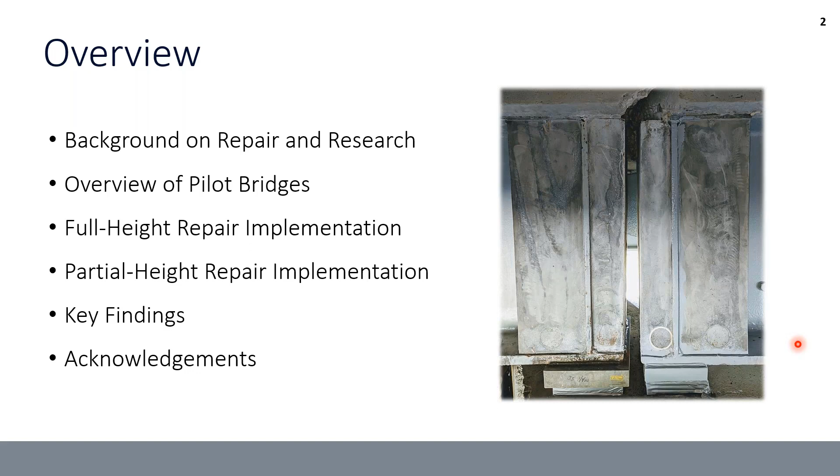So this is the issue we're dealing with. The real issue is shear transfer. The flexural capacity is fine, even if we lose a significant portion of the bottom flange, because bending moments are so low at the end of the beam that it really doesn't affect performance. But shear transfer is the major issue here, accommodating the bearing reaction forces and transferring those into the girder.

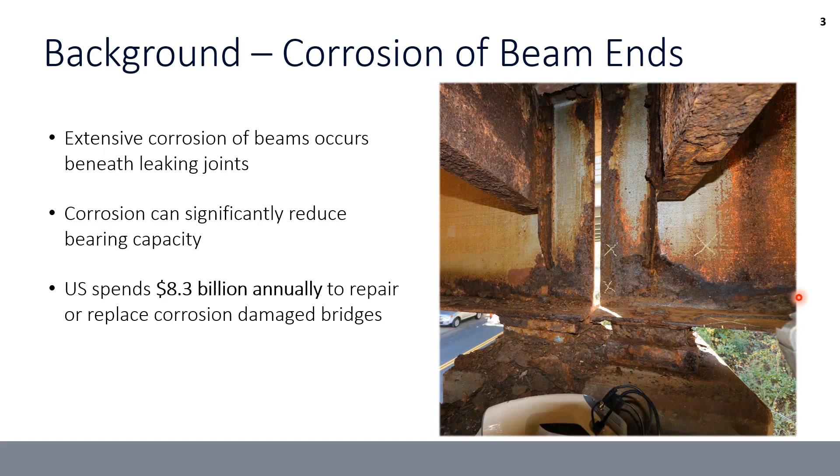The idea with this research was to come up with an innovative way to repair beam ends without jacking the structure, to come up with a repair that is structurally sound, but also stops future corrosion. Because with this kind of repair, you can come in, do a steel repair, and in 10 years you might be back repairing it again. We're trying to get a repair that's more long-lasting and durable.

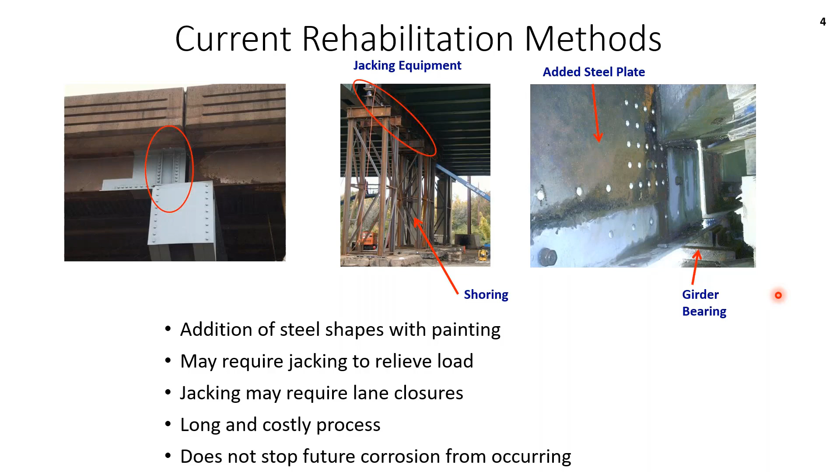Our inspectors went out there and found literally 100% section loss on every beam end. To this day, we're not sure why this bridge didn't have a more major failure, but it was discovered and we had to do an emergency repair.

The idea we came up with was essentially to convert the last 10 feet of the beam into a reinforced concrete beam. We encased the beam in concrete with a lot of reinforcing steel, converting it to a concrete beam end. Very successful repair, worked very well.

Well, then UHPC came along, which I call liquid steel - a very high strength material with tensile capacity as well as compression capacity. And the idea we had was maybe we can use UHPC to do a similar but much simpler approach to repair steel beam ends that are corroded.

Our goal was to eliminate jacking, cutting, welding, and bolting of beam ends - to simply go in and pour some UHPC to repair and restore the shear capacity of the beam. So this is the genesis of the idea.

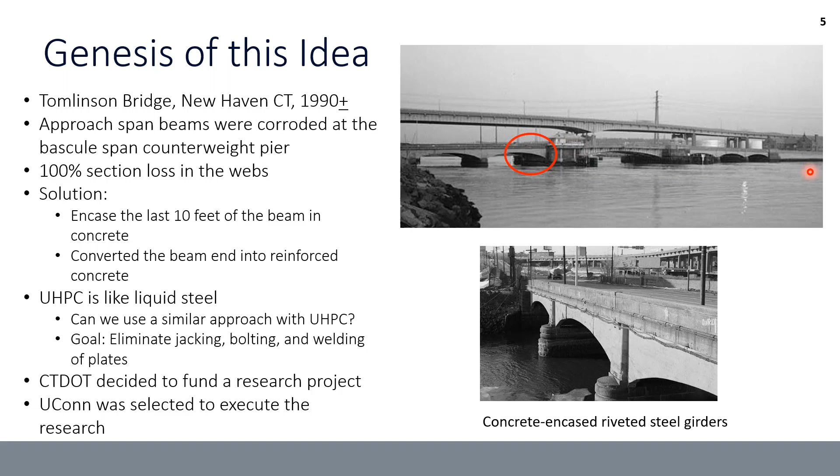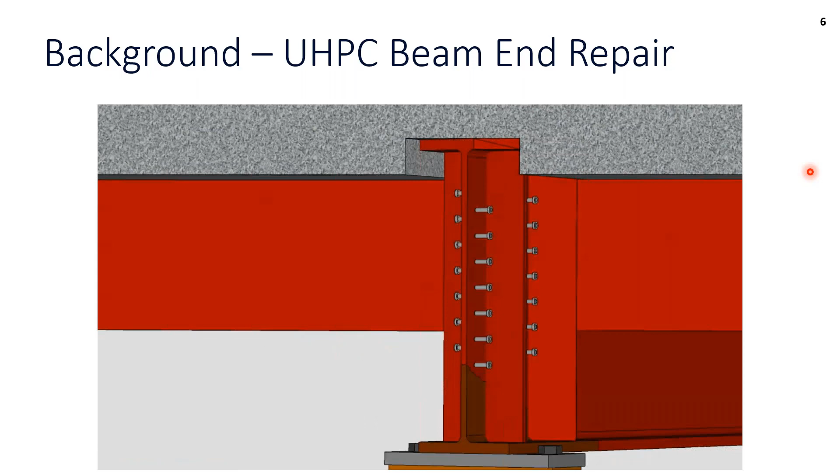The first step is to weld headed shear studs to the intact portion of the beam. We want to clean the surface, weld these with just a stud gun, and then we can encase that full region in ultra high performance concrete. What this does is create an alternate load path through the studs in the UHPC for bearing forces that bypasses that corroded region at the bottom.

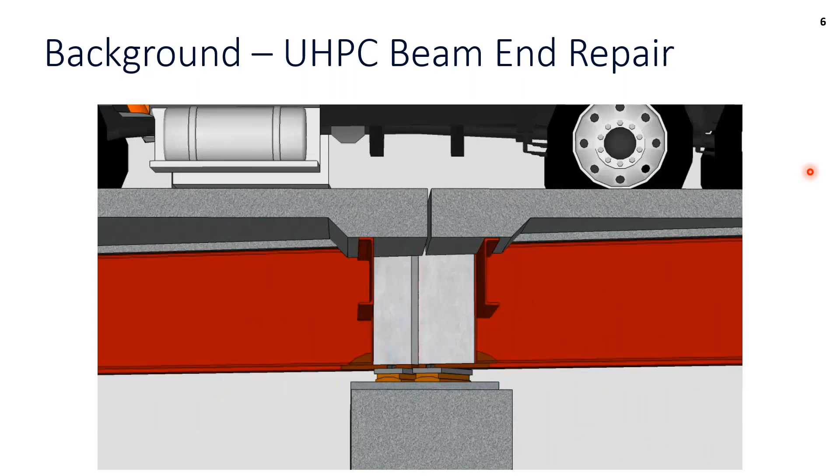After that, we go back and weld the headed shear studs to those intact portions, leaving that bottom alone. Then we cast and cure our UHPC and go ahead and remove that formwork. And you can see we're left with a really simple end block of UHPC, and we're able to effectively translate those bearing forces.

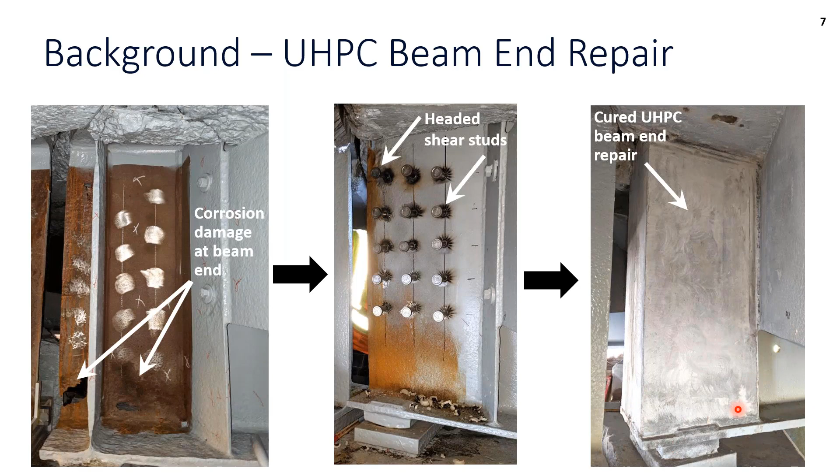Some background on the UHPC material - I know a lot of people are familiar with UHPC, but one of the main questions we get when it comes to this repair is, does it have to be UHPC? Could we do the same thing with regular concrete? We have done tests with regular concrete, and the benefits of the UHPC really come in that durability and impermeability.

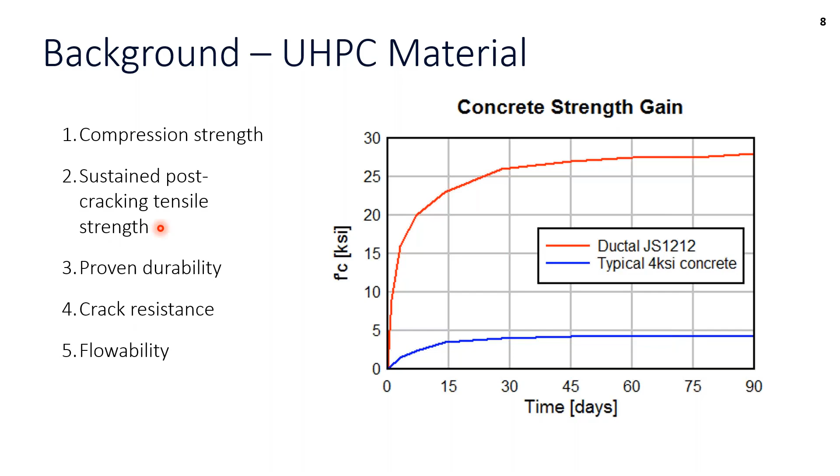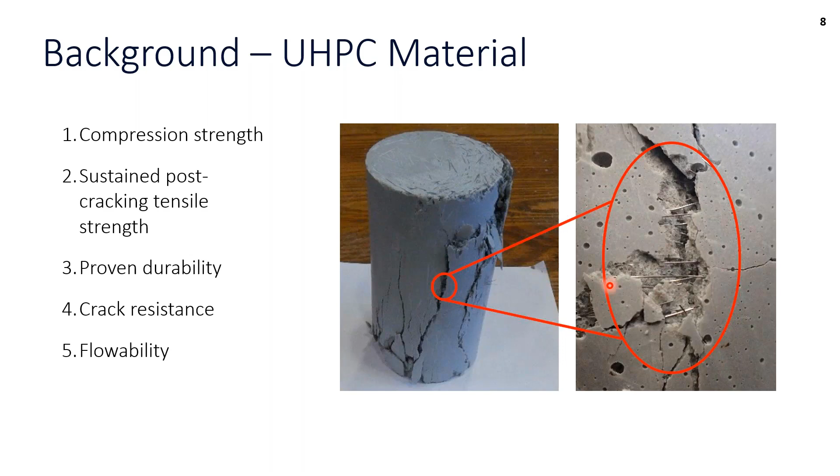It's just the headed shear studs and then the UHPC material. And also, we really rely on that flowability. This allows us to work with more complicated geometries if we have larger skews or we have to use some tighter stud spacing, to really be able to just flow around that and make sure that we have an end that's fully protected from future corrosion.

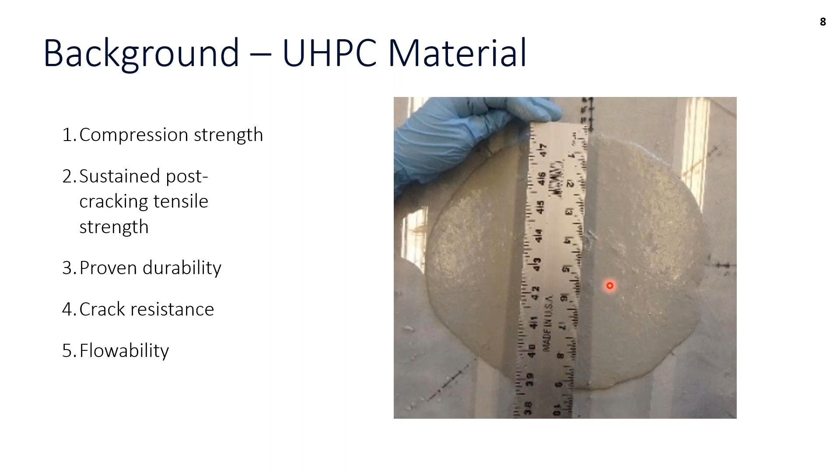Just a little background on the UHPC material, and I think this is just a great picture to show how different it is than concrete. If anyone has been on a project where you're working with UHPC or you've gotten a chance to touch it, mix it, it really is a different ball game.

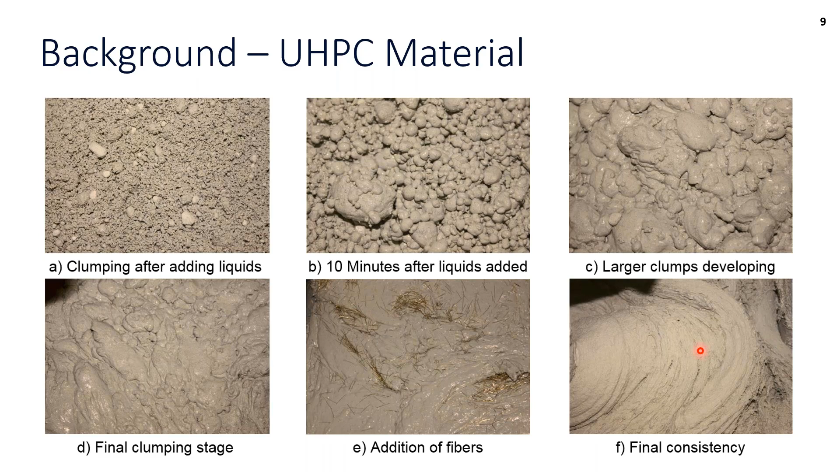So it takes a while for the mix to turn over. And so if we have contractors that are not familiar with UHPC material, the answer can be like, oh, I think we need to add more water, it looks too dry. But this is the progression, and we see that different level of clumping. And then eventually, at the end, we're adding those fibers, and our final consistency is where we get that really nice flow. And that flowability is really important for the different ways that we can cast.

So I'm going to go back pretty much to the beginning, starting about 10 years ago, which is after the idea came out about this research. What are the first steps to pilot it and really do some proof of concept testing to see if it was going to be feasible?

So this phase of the research, Dr. Arash Zaghi was the principal investigator of that at UConn. He was the principal investigator for all three phases of research. And Dr. Kevin Zmetra was the lead PhD student on this.

Another key part of that project was looking at our finite element modeling to determine what are those really specific design parameters that we have to look into further. And that led to phase 2.

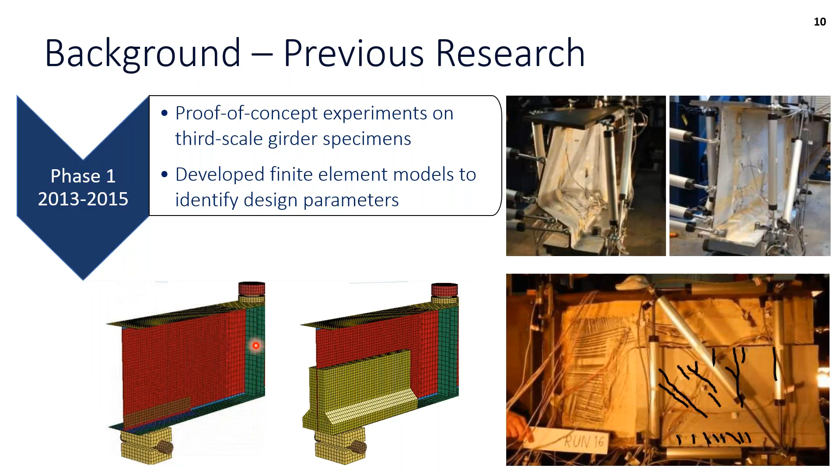And I also want to give a shout out to Connecticut DOT. It was absolutely critical that they were involved in this research every step of the way, giving feedback, being in the lab for all the testing, seeing what needed to be done so that they would have the confidence to put this on a bridge in the field.

So moving into phase 2, one of the first things that we had to do was investigate that stud capacity. We are relying fully on the studs to transfer the load to the beam end, so we're not counting on any residual capacity of the girder. So we need to make sure that we feel confident in the design of those shear studs, the number that we need, the size, and how that affects particularly a thin plate.

And through this, we were able to refine these stud capacity equations, look at different things, what happens when the bond is broken, the full beam is exposed to corrosion, how do those impact the capacity? And that work was all led by Dr. Dominik Kruszewski.

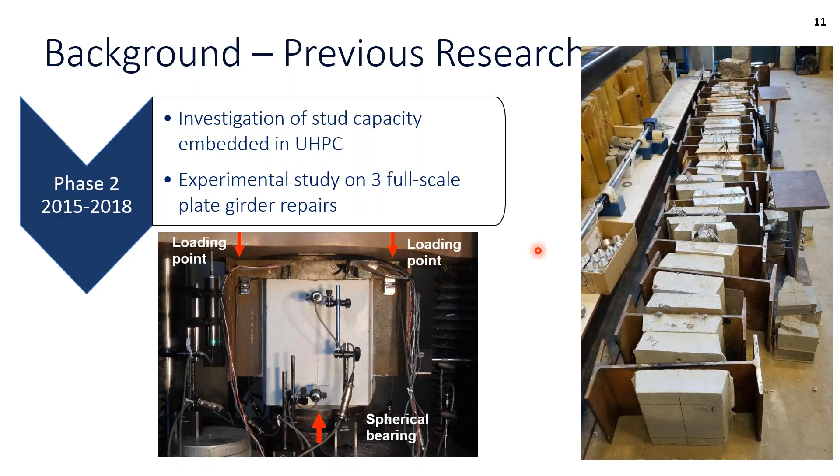The second part of phase 2, and this is something we get a lot when working with DOT, is they really want to see the full scale. They love seeing the smaller scale tests for proof of concept, but we needed to see the full scale tests. So this portion of phase 2 was led by Dr. Kevin McMullen, and we did studies on 3 full scale plate girder specimens.

One of the other main questions we get is, we're saying we're not going to jack up the superstructure. How is this going to perform? So we went out and collected vibration data from a local bridge and fed that into our shaker to make sure we were able to simulate that live load during casting and curing.

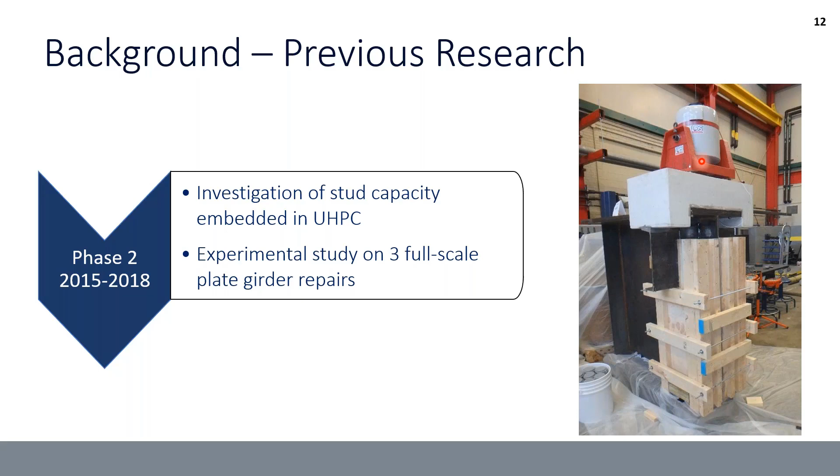So you can see we did this on a full scale plate girder. This is Dr. Kevin McMullen for scale. This was his PhD research.

One of the most challenging parts was looking at this simulated corrosion damage. In the first phase of the work, we just did uniform section loss, but as Mike mentioned earlier, that's not something we see in the field. So we did a variation of grinding and sandblasting to make sure we were matching a profile. This kind of profile of section loss at the beam end came from an inspection report of a bridge in Connecticut.

Right here we have this splice connection. This left-hand portion of the beam is what we call our test end. We did this to be able to swap ends in and out to complete all the tests. This was the permanent end of the beam.

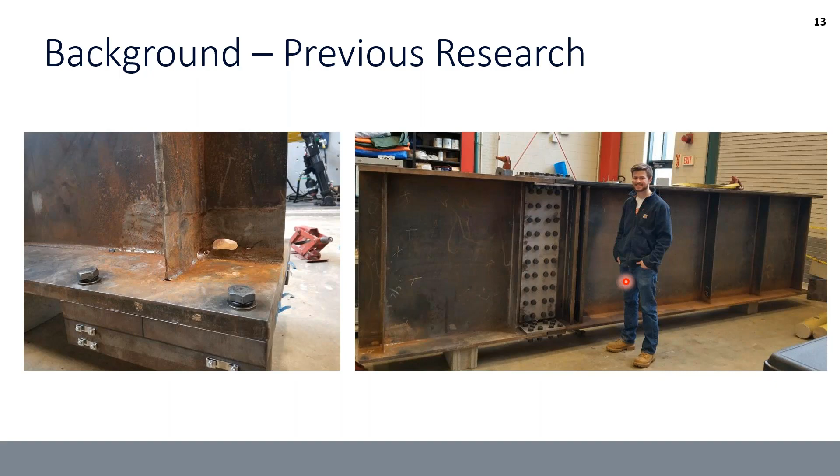Here you can see the 3 different UHPC encased sections that we tested. We looked at different heights. This is what we considered a full height, so we did 2 full heights with different materials and also a partial height. This is the test specimen in our full load frame in the structures lab at UConn.

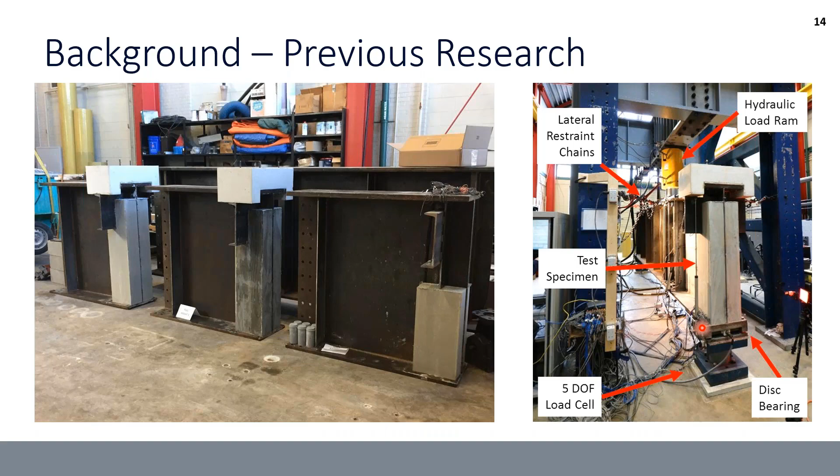These were fully instrumented tests. In here we have a sample from the partial height, and what's really important is this shows subsequent cycles of loading, with the load increasing from left to right. We were able to completely eliminate any sort of failure at the beam end, and we were actually able to get that full tension field action.

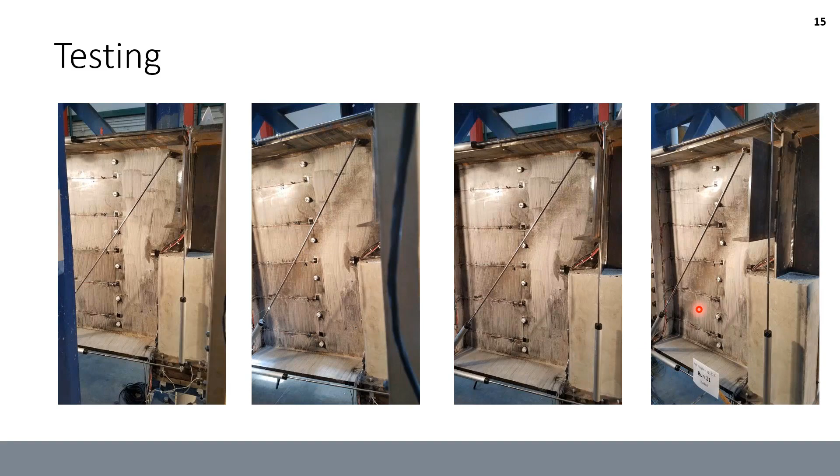Moving on to phase 3, and this project is just wrapping up. This is where we focused on how we can translate what we did in the research. Everyone was very excited about the results and felt confident in the structural performance, but now how do we get that out there to the broader community?

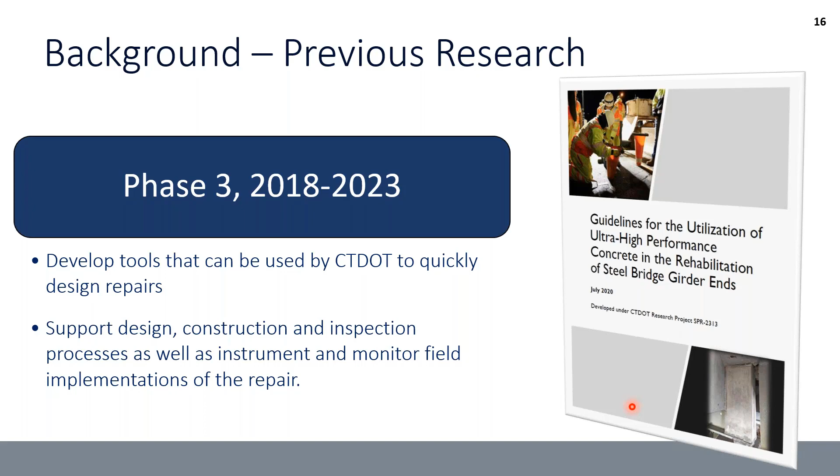So we worked on developing a guideline for the repair to be posted online for Connecticut to use and to be shared with other designers, and also how we could help them on a pilot implementation to fully monitor the bridge and make sure we had confidence in how it was performing.

So here are the 2 implementations the research team was involved in, and I'm going to be talking about both of these today. The first was on a rolled beam bridge from the 1960s. This was a plain carbon bridge, and we were doing a full height repair.

This casting took place over October 2019 to May 2020 in a series of different casts, and we had some road closures associated with this because we were casting from the top of the deck. This was the first implementation. It was a consultant-led design.

In our second implementation, we learned a lot from the first. This was a plate girder bridge from the 80s. One of the main differences was this is weathering steel. So before we went out and did this repair, we also did another series of those push-off tests to make sure that all the equations we were using for stud capacity were still applicable when working with weathering steel. And we found that they were.

This casting took place about 2 years later, and this was only a partial height, so we were able to cast from below deck with no road closures on above.

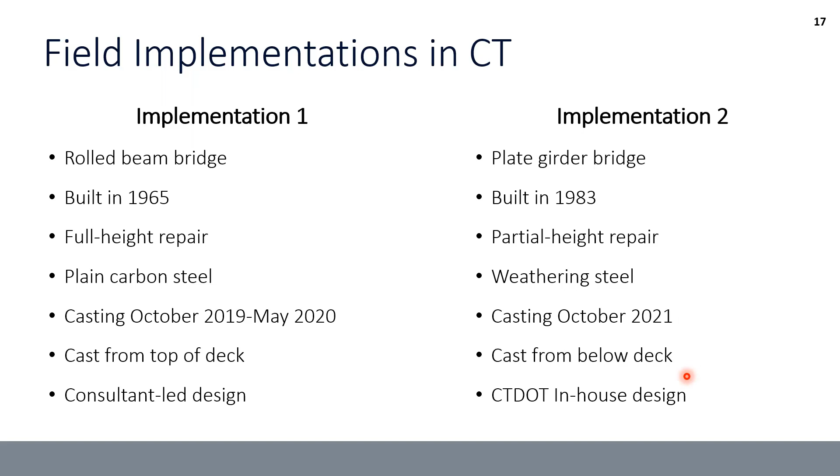So here's our first bridge in New Haven, Connecticut. They gave us a real doozy for the first bridge. It's always fun when you're working over rail, and we worked particularly over electrified rail lines and freight rail. There were beam end repairs on all 3 of these piers noted here. This is Interstate 91, one of 3 major highway interstates in this state. Overall, we were repairing about 45 beam ends.

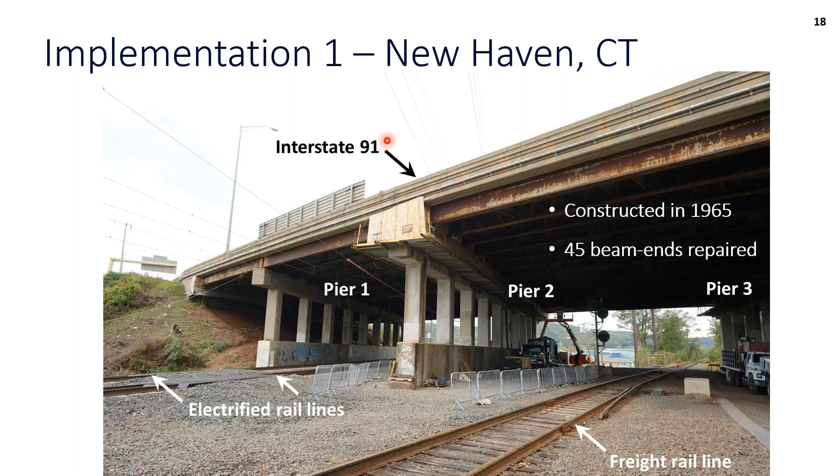So this is just another view from farther back. We had a composite concrete deck. One of the really unique parts about this bridge is we had variable beam sizes, the depth of the beams changed. We had different skews ranging from 25 to 35 degrees. We also had different end conditions, some beams had bearing stiffeners and some did not.

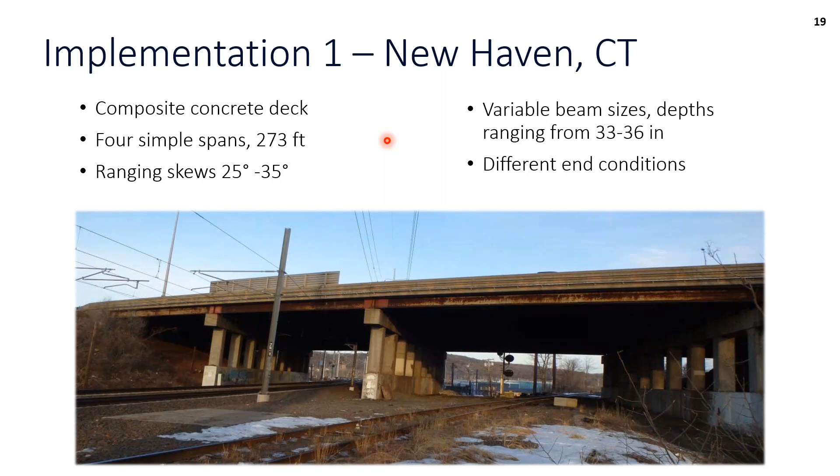So the beam ends, end diaphragms, connection plates, everything was severely corroded. You could see we had really significant losses in bearing capacity, and we had some shear capacity loss as well.

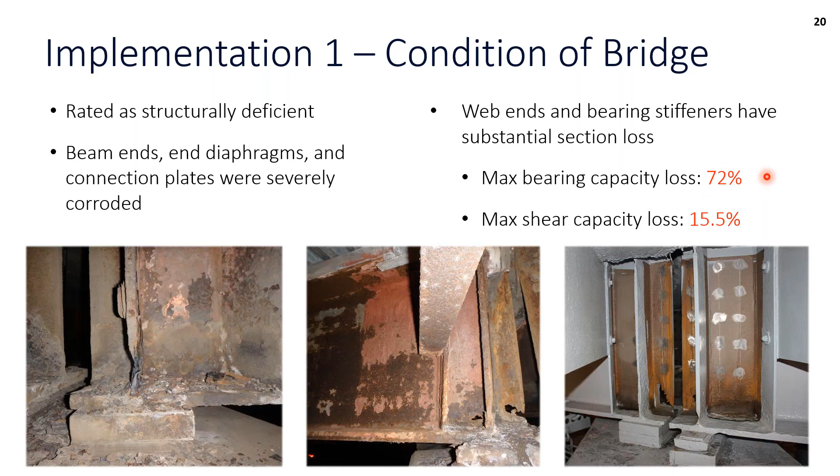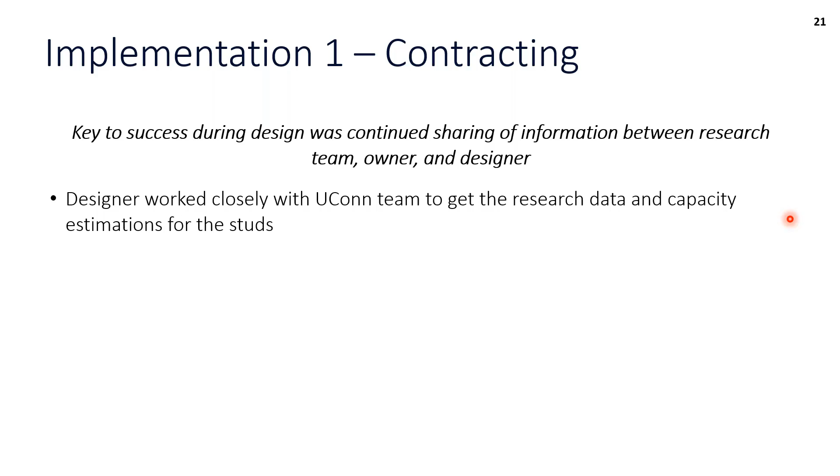Talking about contracting, this was the first implementation of this repair in Connecticut, and I think it was really a model of how a group of people - the contractor, research team, owner, designer, inspector - can really all work together and share lessons learned. We worked closely with the designer to get any of the research data they needed, the capacity estimations, and went back and forth on some of the design to make sure there wasn't something we encountered in the lab that they weren't considering.

A couple of really unique components in the specification for the contractor: the state did require a pre-bid meeting for all contractors bidding on the project. In this meeting, we reviewed UHPC material, talked about the history of the repair and the research we have done. We also specified - the state specified - the UHPC material supplier based on the research.

And this is one of the biggest takeaways - if I can say it, I'm going to say it probably 3 times during the rest of this presentation - is if you're doing something new, make sure to include that mock-up, particularly if the people you're working with do not have a lot of familiarity with UHPC. At this point, UHPC wasn't being used in a lot of other capacities in the state, so it was really important that everyone was on the same page, and the contractor selected was able to lead that mock-up to get more confident.

Another fun one, every contractor's dream, was that they had to provide access for our team to go in and do the instrumentation.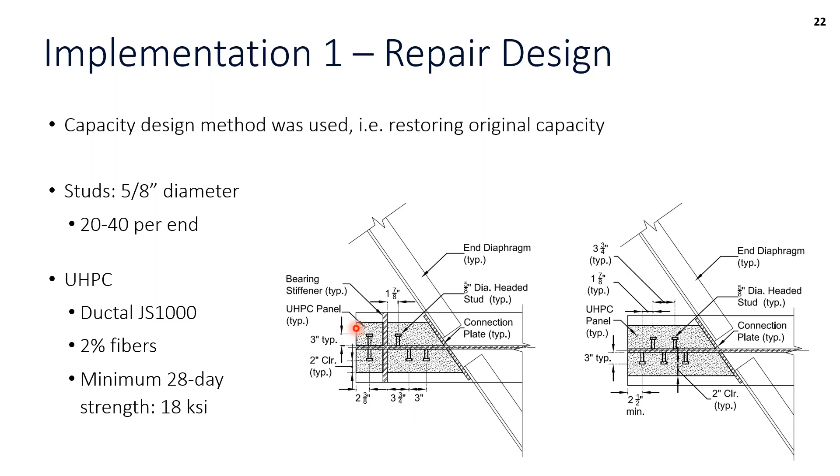For the UHPC, the Ductal JS1000 mix was used with 2% fibers, and this is something unique to the specification - they required the 28-day strength of 18 KSI. All of our research was done achieving higher strengths. We did do some tests to show that the 18 KSI was more than sufficient to get the performance we required, but this really came in because they just wanted to make sure they weren't rejecting material, since you could see the complexity with some of these beam end designs, and working with a material like UHPC, it's not exactly easy to get rid of if something isn't working properly.

Moving on to that mock-up, this was done in the contractor's yard, and this was their first example of trying what they had proposed for the formwork and the distribution system of the UHPC. So here is our steel beam and specimen. They just used plywood forms and bracing, and a PVC distribution system was used to enable casting from the top of the deck and filling multiple beam ends at once. This top sheet of plywood simulates the bridge deck, and we have this inverted cone.

I know, Mike, you have a good word for it. It's a UHPC placement device or something - worked incredibly well for the casting of UHPC. They were able to just pass up those 5-gallon pails, pour it into the inverted cone, and that pressure head was enough to fill all of the forms. It's the high-tech UHPC deployment cone. All right, yeah, you get to patent that one.

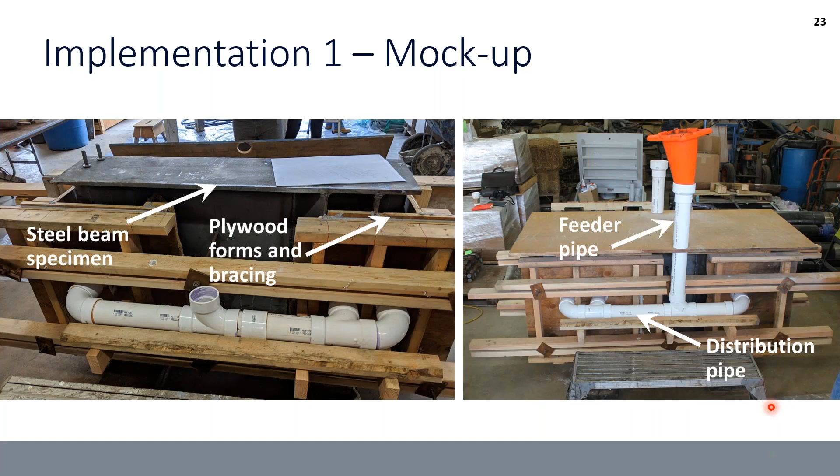I love that name. And here's a view of the final mock-up, and you can see this is a little bit of a difference from the mock-up.

This is the height of the UHPC that was stated in design. There was a gap there. However, when we actually moved to the field, some of the later pictures you'll see, we did end up casting all the way to the bottom of the top flange.

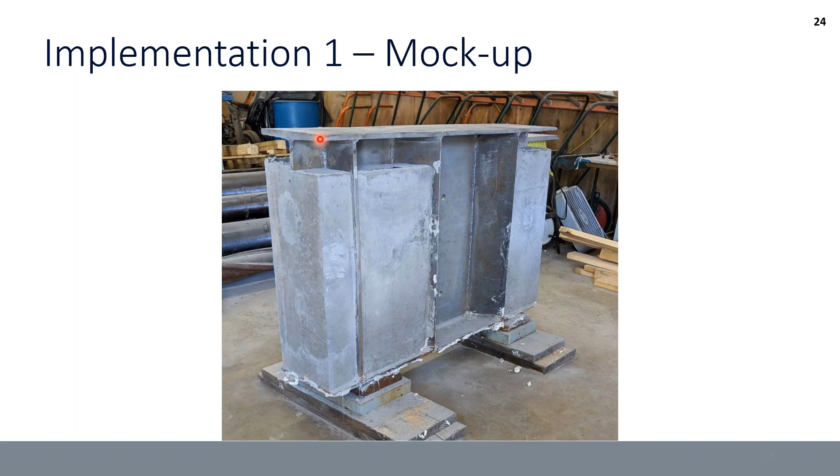So now moving into the field, working on the stud welding. The first thing that's really critical is that when we're looking at these weld collars, we count on a complete collar around the stud. We did have several issues when it came to having a gap around the top, and that's something to make sure the inspector is on board with and looking out for.

We handled that by either adding additional studs, so we weren't counting on the capacity of the stud with the incomplete collar around it, or some were repaired with just some stick welding. This is why we have to have that thorough cleaning of the place right underneath the studs. It's a really critical component.

Here you can see just using that standard stud gun to attach the studs. And here we have two representative views of a stud layout, one when we had a bearing stiffener and another when we did not.

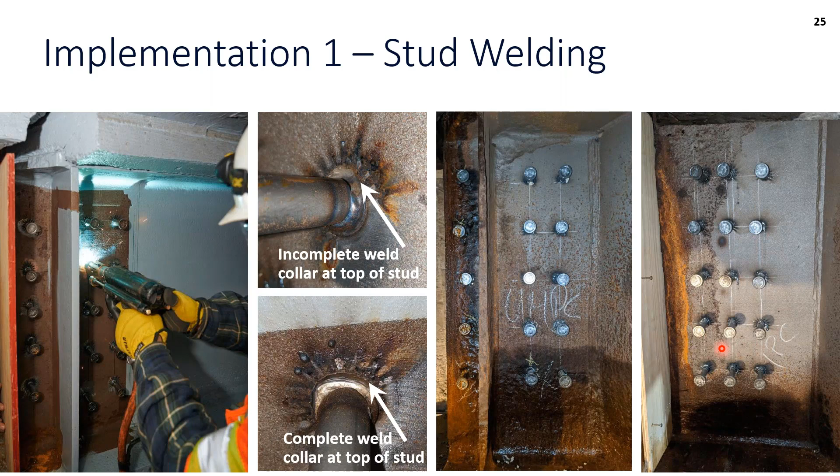Moving on to some of our monitoring. After the studs were placed, we did fully monitor four beam ends. This is a view of our NEMA enclosure with our different data acquisition systems and all the wiring for our sensors coming in. This is a view of one of the beam ends, and we had different gauges embedded in the UHPC to monitor the strain in the UHPC, strain gauges on the web and the studs to see how that was performing, and other thermocouples to track how the UHPC was gaining strength, relating that to the temperature of the cast.

So really some comprehensive monitoring, and we placed our monitoring on two different piers as well.

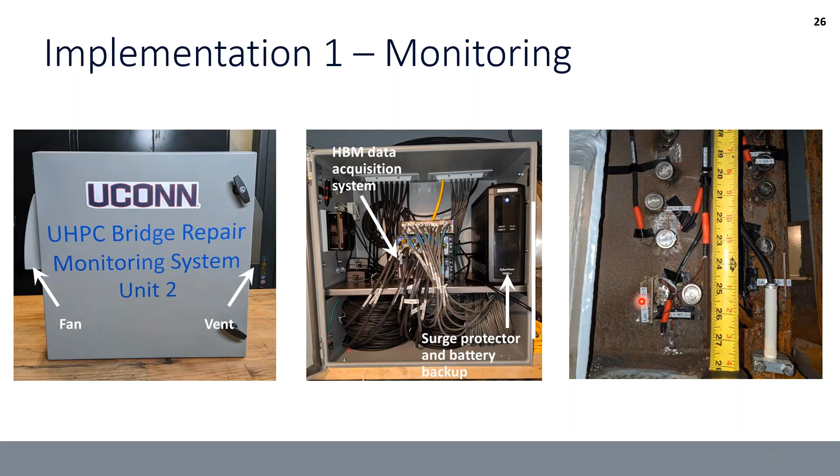With the forming, you can see this is once the decision was made to cast fully to the top of the flange, just standard plywood forming. This is something the contractor was great at. I do want to point out that we did have rods going through the web of the beam in two locations to tie those down, to make sure we weren't going to get any sort of blowout of the UHPC.

We also had vent holes at the top of the form, and those got plugged once the UHPC was reaching the top, just doing some simple silicone sealing. For those of you who've worked with UHPC, we did specify a watertight formwork, because once it starts going it can be really challenging. Including these ties really helped us avoid any explosive blowouts, and that was a huge concern since we were over the rail. Then this PVC distribution pipe went straight up to the bottom of that deck core.

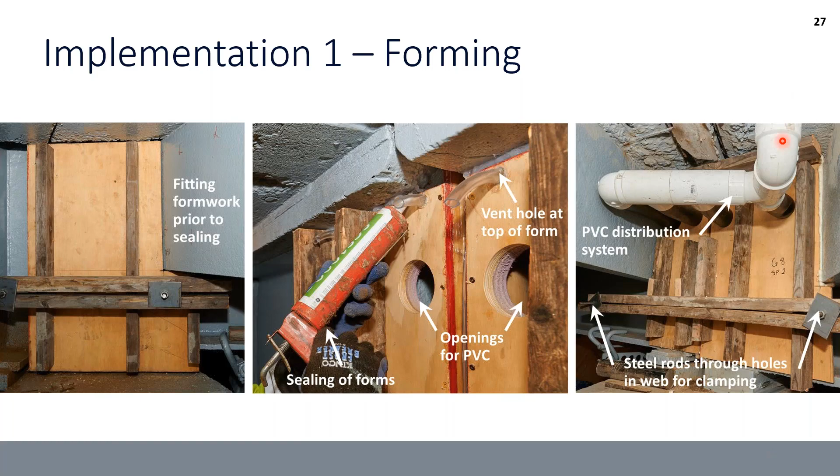With mixing and casting, this was all completed on the top of the deck, and we had two of these mixers going at once. We did have partial lane closures. The core holes through the deck were done in advance, so that went really smoothly. The UHPC was actually filled all the way to the top of the deck, so no further deck repairs were required after casting.

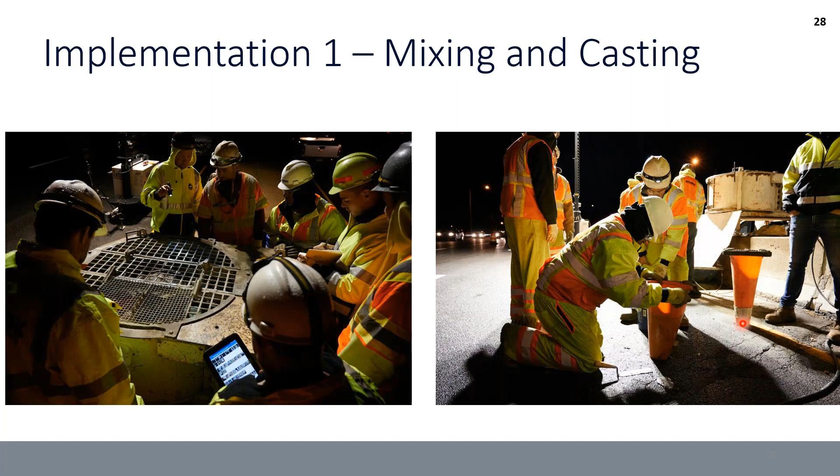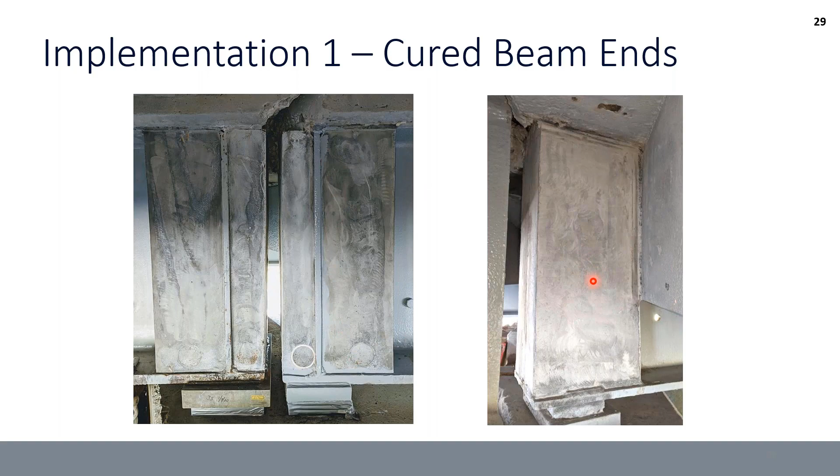To show that we were getting the performance we expected, we looked heavily at our data collected on the repaired beam ends at different locations. There are two main things we were looking for. The first is whether we're engaging those UHPC panels, and we did do instrumentation before the repair and after. We wanted to see a reduction in the magnitude of web strain under live load events, and we really wanted to see that shift - when we get that truck passage, how much strain is going into the web.

You can see before casting, we were getting around 200 microstrain, and then once we reached 28 days after, we're now below 25. This is really going to vary depending on what that initial strain is and how much deterioration we have first and foremost. But we did see a reduction in all of those high magnitude strain events.

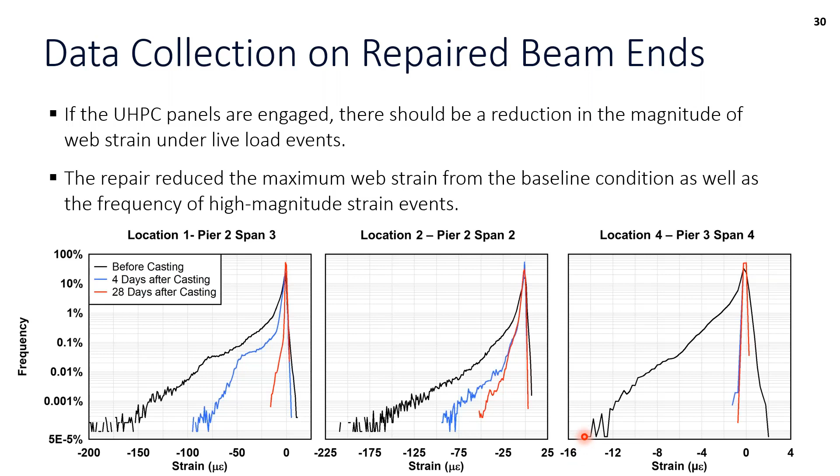One of the other things we were looking for is a correlation between our strain measurements. So when we're getting a peak from a truck on the web, we're also picking up that strain in both the UHPC and the studs. We saw that on all ends as well.

Now we're moving on to our second implementation. This is the one in East Hartford, Connecticut, on our weathering steel bridge. We had about 50 beam ends repaired here. The bridge was a mix of simple and continuous spans. We were only doing the repairs where we had the joints, so at all of those simple ends.

Once again, this was on I-84. In Connecticut we have 3 major interstate systems, and we got to do 2 of the 3 in our first 2 trials.

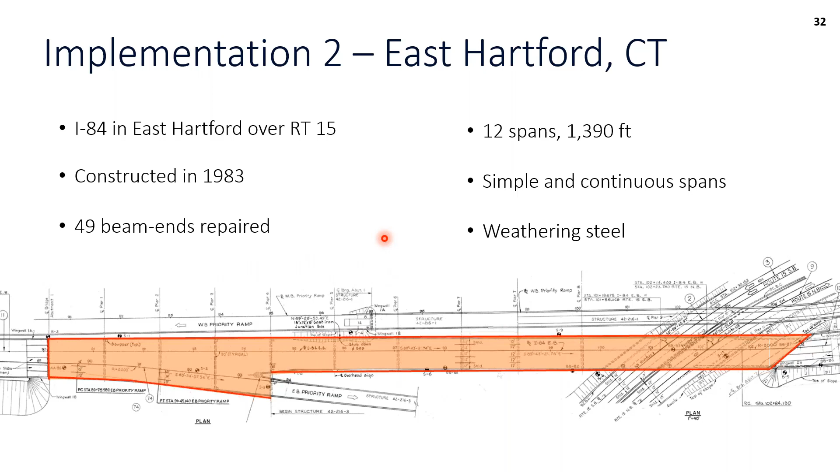So this is another picture of one of the sides of the bridge, and here you can see the difference. In the first project, we fully cleaned the beams and repainted them. Since we had weathering steel here, that wasn't done—we were only cleaning the area where the repair was going to go, and you can see the other portion of the beam where we left that patina.

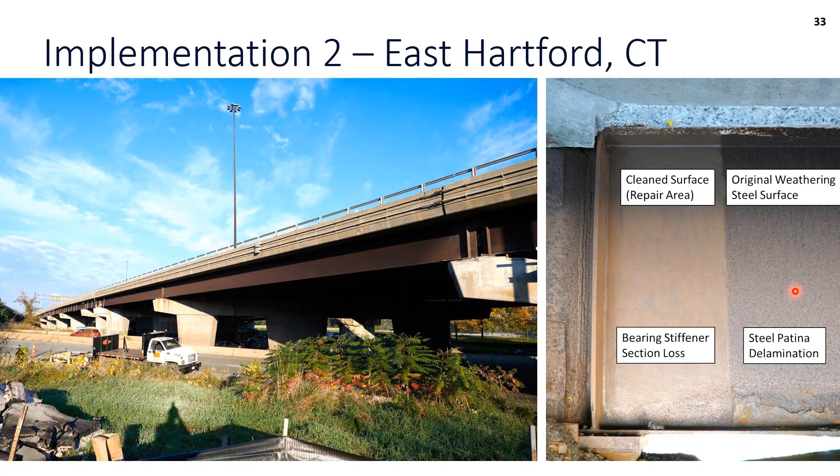This bridge was also rated as structurally deficient, but here we had a really different corrosion pattern. In the last project, it was largely focused on that kind of 6 inches above the web, that local area roughly over the bearing stiffener.

With this project, we had corrosion along the bottom 6 inches or so that extended 10, sometimes up to 20 feet. So one of the concerns this project had that wasn't seen in the other one was, what's going on with this interface condition—how are we transferring that shear strength between the bottom of the web and our bottom flange? That's something that was considered in the design.

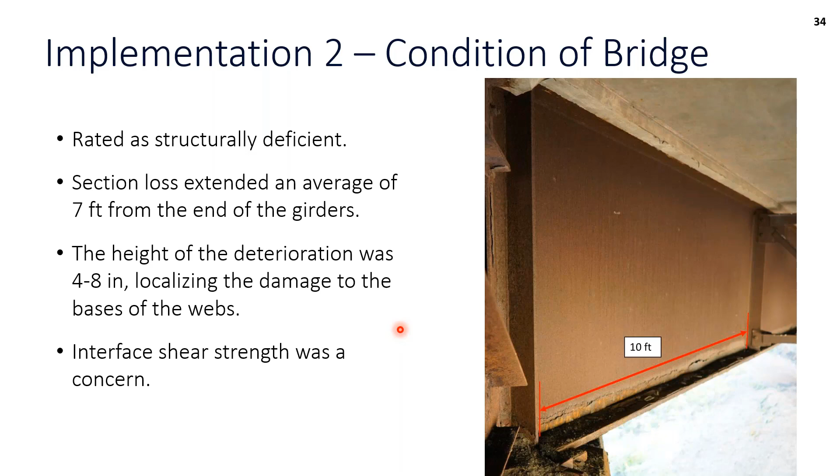Some of the differences in contracting in Connecticut—there's some design done internally, some sent out to consultants. The first project was done by a consultant. The second one was done internally by the bridge design unit. And after the first project and some more research on the weathering steel tests, we felt very confident switching to a performance-based specification.

The DOT certainly wanted to move away from specifying any supplier, so we were able to shift to that performance-based specification. We did have to include some details on the partial height repair for finishing that top surface—we wanted to make sure there was no pooling of water on the top of the UHPC.

And once again, we did include instrumentation. This site was a lot easier to work with, without having to coordinate with rail, but still having to provide our team with access.

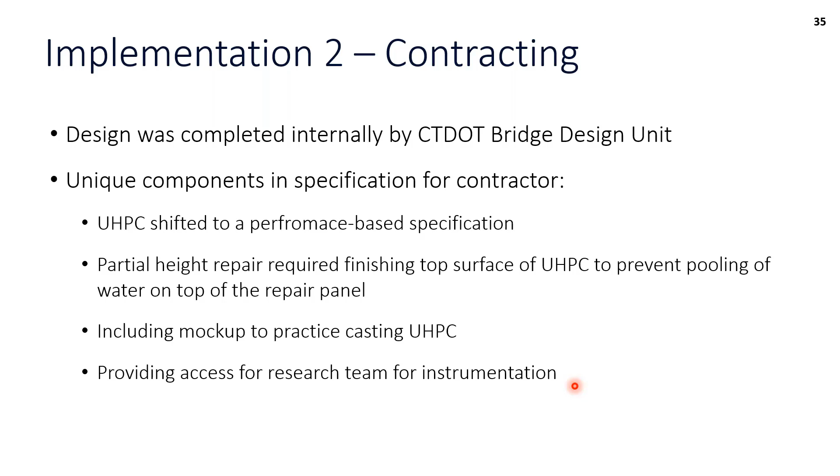So here's an overview of the repair design. Similar to the first repair, 5/8 diameter studs were used. We looked at the strength 1 load combination for capacity. Here's the stud equations that are represented in the guideline as well.

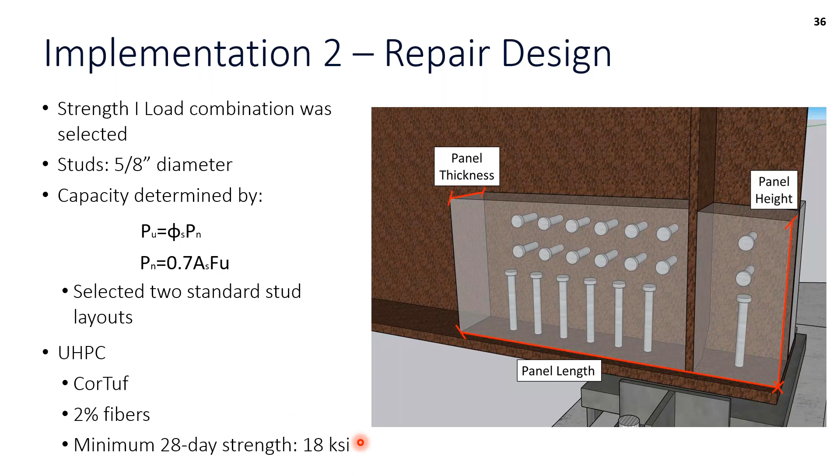One of the nice things is that whereas the first bridge had a whole bunch of different parameters in terms of skew, beam height, and types of beams used, in this project we were able to use 2 standard stud layouts, which I'll show more on other slides. The UHPC we used here, CorTuf, was ultimately selected by the contractor with 2% fibers, and we had the same 28-day compressive strength noted in the specification as 18 KSI.

One of the exciting things I really want to point out is that you will have access to these slides, and we have the links. All of the drawings for this project are posted online along with the specifications, so feel free to go to the DOT website and take a look at those.

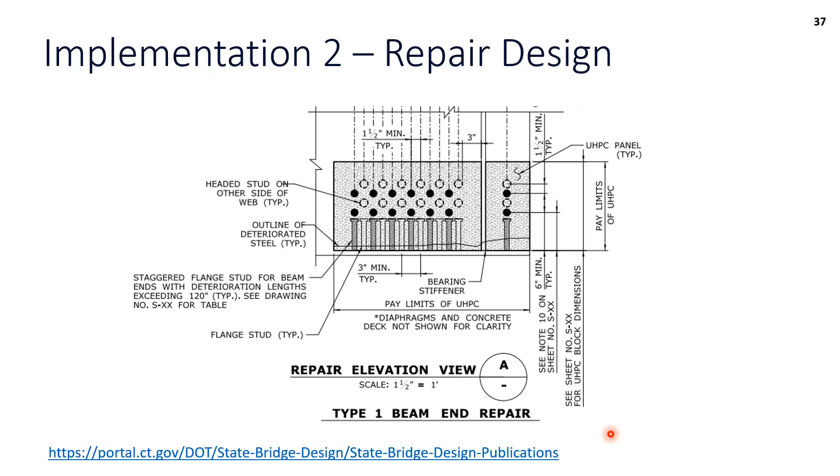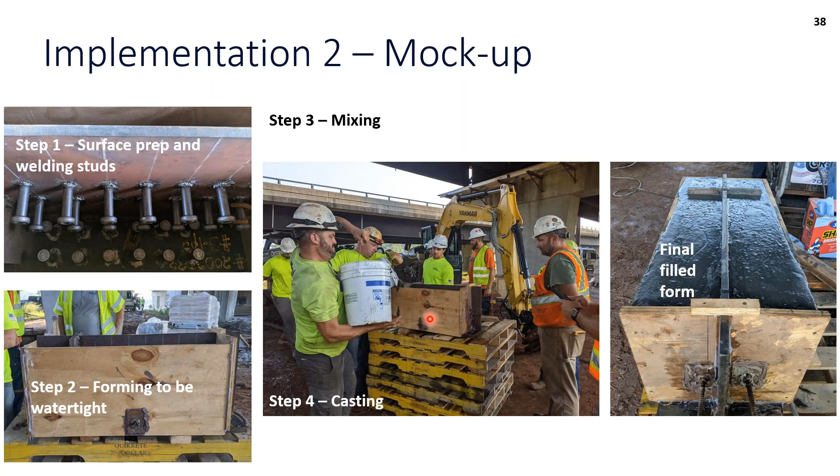Looking at the stud welding in the field, this is where you can really see those two main differences in the standard layouts. In the first layout, we had less significant corrosion damage, so along that interface between the web and bottom flange, we only had one row of flange studs. Where we had a longer length of corrosion, we had two rows of flange studs.

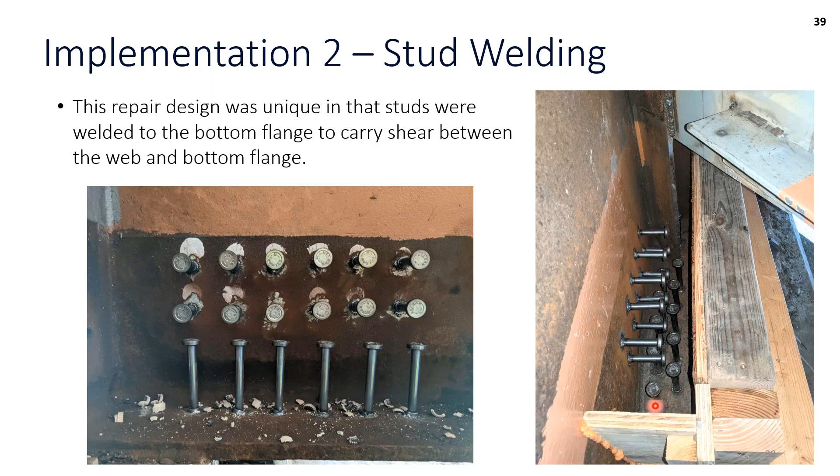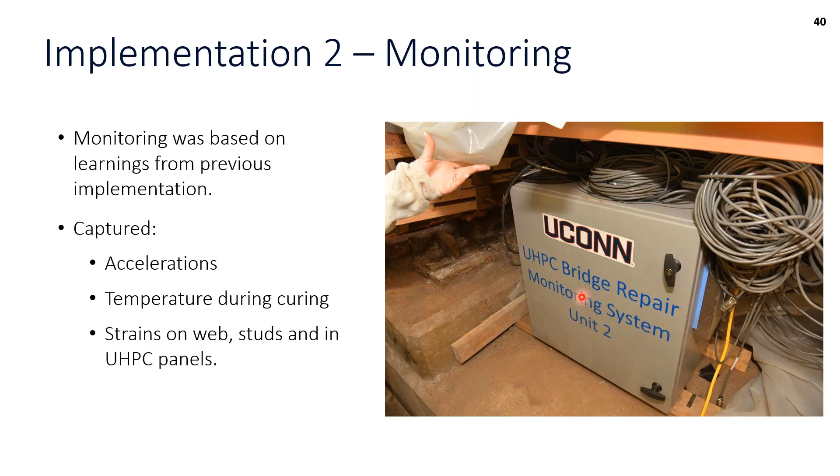For monitoring, we used the same sort of NEMA enclosures. The only thing is we limited some of our monitoring. We were able to look at the data we captured first, and then scale it down, using fewer sensors to focus on the critical information. So we still were collecting our accelerations, temperatures, and strain on the web studs and in the UHPC. This is just a view of what that instrumentation layout looked like on the beam ends we were monitoring.

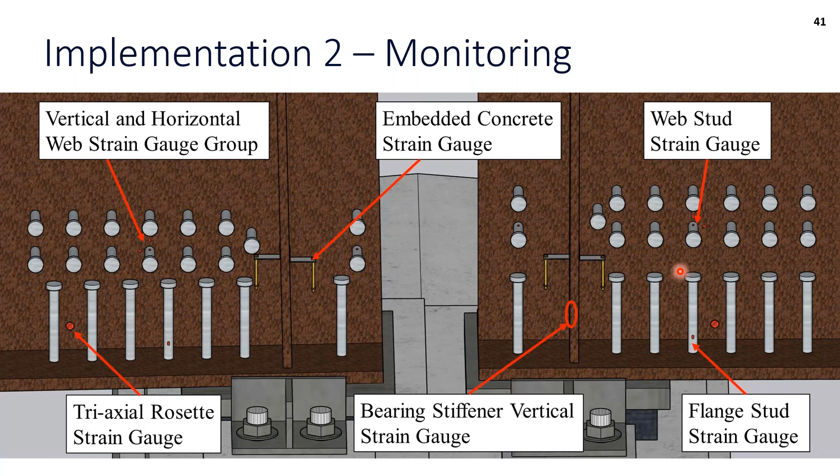Forming was certainly much easier for the partial height repair. One interesting thing is that for the partial height, this project also included replacement of some of those diaphragms. Those were lifted above the limits for the UHPC panel to prevent encasing any of the steel if future repairs were required.

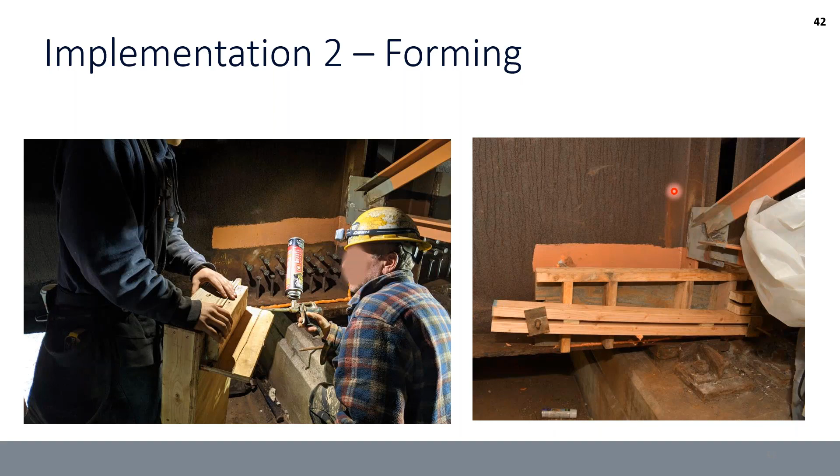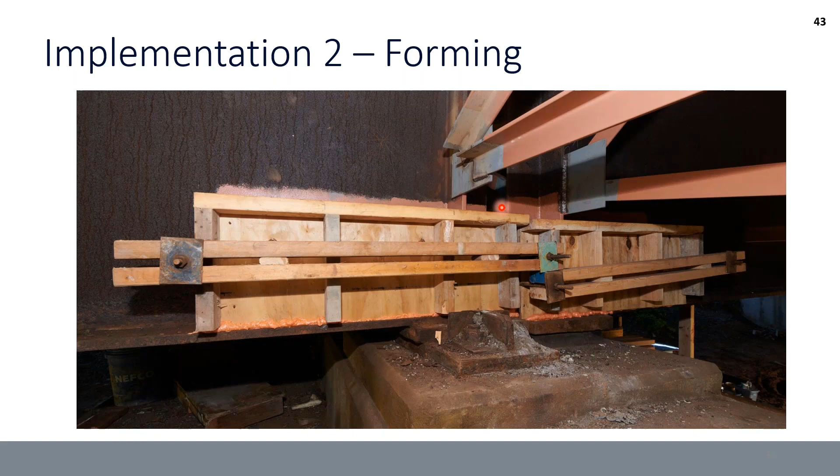Otherwise, very similar forming with the plywood. We went with the same hole drilled through the back of the web, and then another rod going through the plate between the gap and the webs of the beam on the same pier.

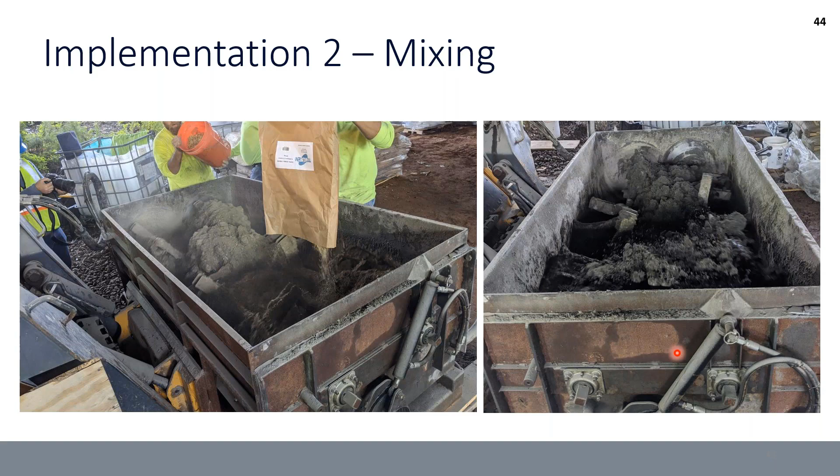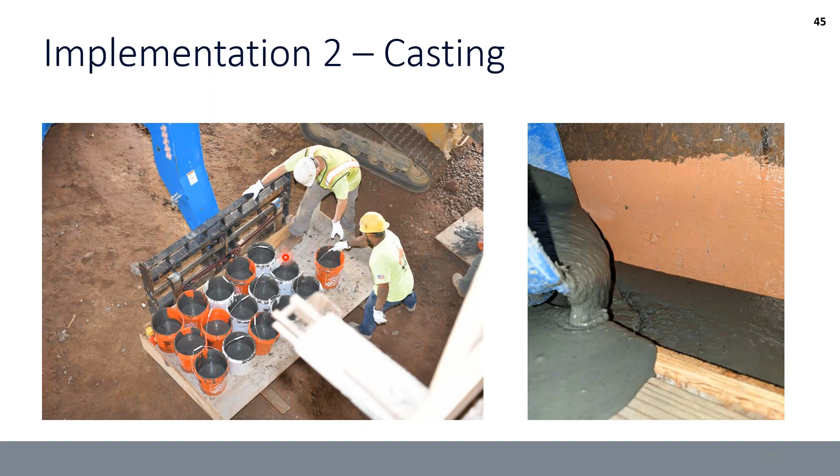For casting, we were able to just use a lot of those 5-gallon pails, lift them up with a boom lift, and fill from the top. The contractor did choose to go back and grind the surface to get the required grade, rather than doing any top forms.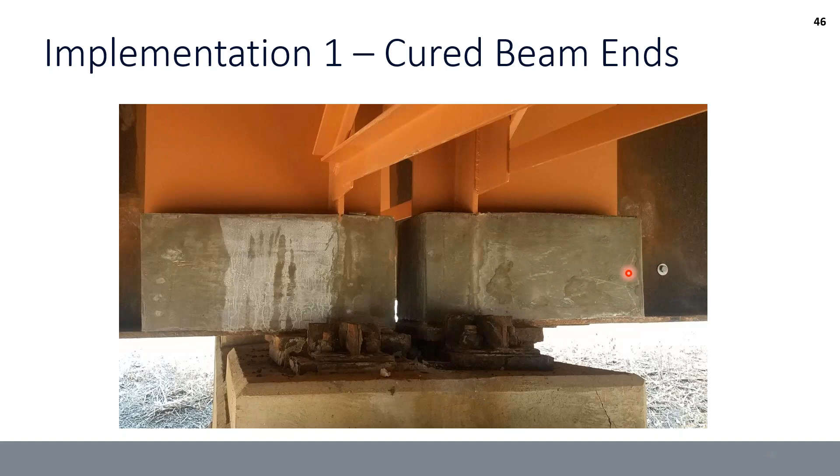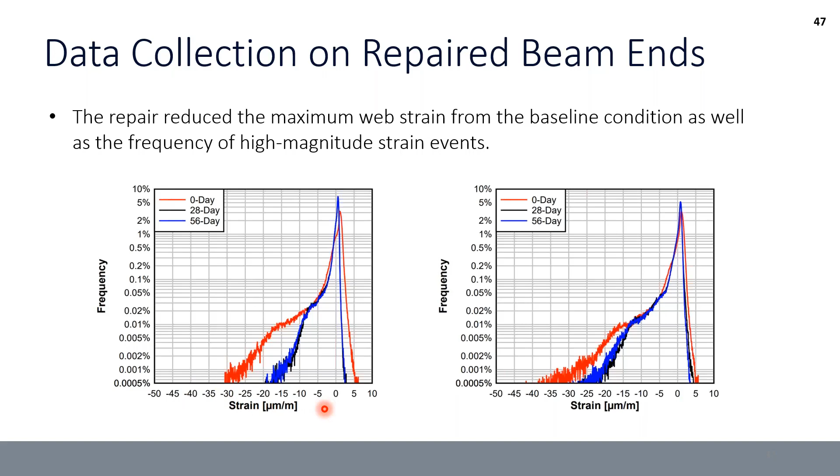One really interesting trend we saw is we had one location on the bridge with a full perforation, over a foot long. Looking at the web strain there, initially we were getting almost no strain because there was no continuous load path. After repair, that location was actually picking up additional strain, so we were able to really re-engage that portion of the beam end, which was great to see.

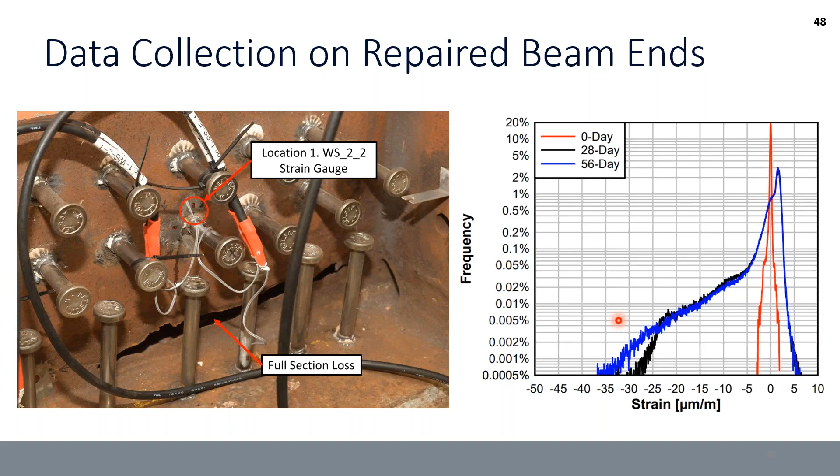Looking at our other trends, we're still getting those same peaks of web stud and concrete strain whenever we're getting truck passages.

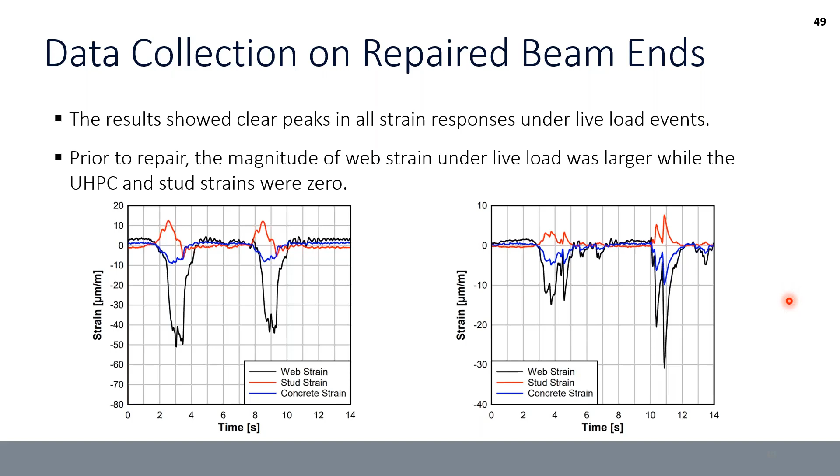So then looking at some really important lessons learned, over the last 10 years we've worked on developing the repair procedure for corroded steel beam ends using UHPC and thoroughly evaluating it through experimental and finite element simulations. Moving on to the field work itself, not to toot our own horn as the research team, but I think it was really important in the first couple implementations to have the full team involved. We have an incredible relationship with the Connecticut DOT in working with them to make sure we had that smooth transition from research to practice. And now we're at the point where they can move this forward without us.

Some really crucial aspects of implementation include making sure you thoroughly clean the area where the studs are going to be welded. One of the main causes of incomplete or low quality welds was surface preparation not done according to spec. The specification can be clean and clear, but you still need to make sure the inspector and contractor are aware of its importance and that it's being looked into in the field.

Another big thing is most contractors are used to using standard ceramic ferrules when shooting shear studs for composite action, but it's different when shooting on a vertical surface. Sometimes it's just a slip of the mind to make sure the correct ferrules are ordered with the studs rather than the standard ones being included by default. We saw this in a couple of the field implementations, just making sure those proper ferrules are used. Even though it's in the spec, you need to stay on it in the field.

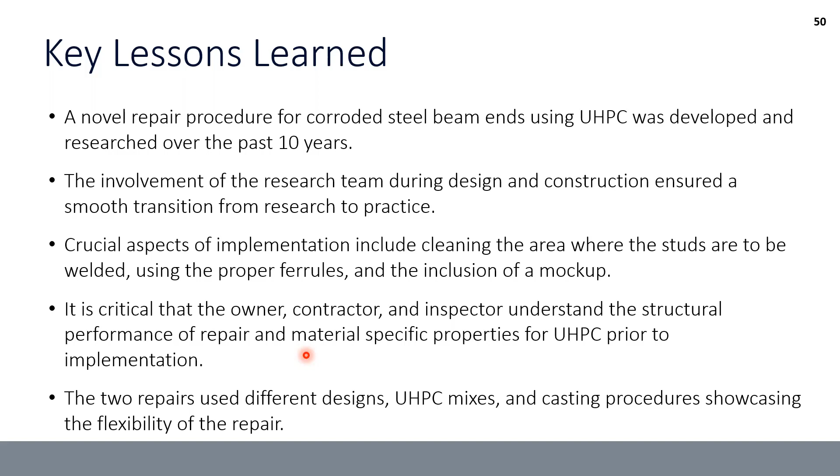To show how much more widely this is being used, these numbers are from maybe last month, showing all the different projects. The two in green are the ones showcased in this presentation, but there are about 35 more in design and construction across the state. This is something Connecticut has really taken and run with. It's not only in Connecticut either, it was included in the Every Day Counts 6 initiative, so it's being used nationwide. I know there were at least 5 or 6 states using it as of last year, and I'm not sure what it's up to now, but it's really taken off and it's exciting to see.

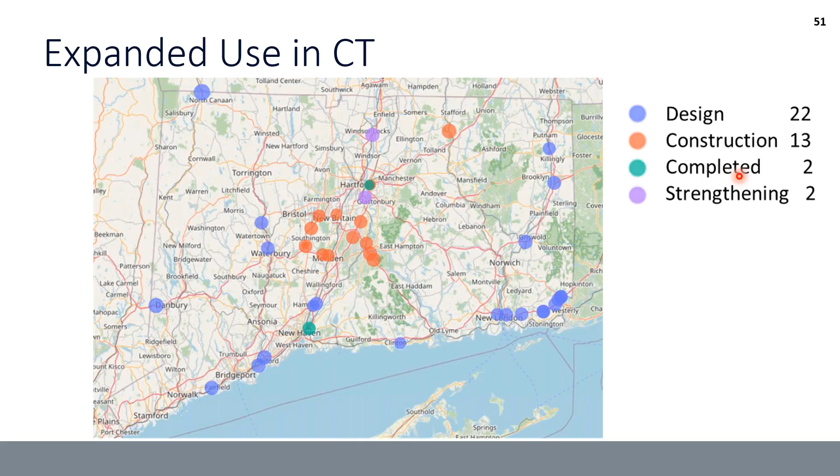I also want to include some links to available design tools. The ones prepared by our research team, along with sample drawings, are all hosted on the Connecticut DOT website. From EDC 6, there are also great materials with more of a national perspective. And we have some YouTube videos that show the repair process in more detail.